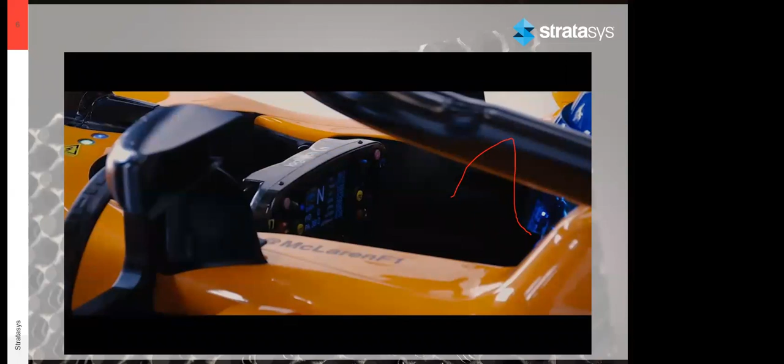It's one part or 1,000. From lifelike prototypes to full-function components, we're helping turn complex problems into simple solutions while quietly changing millions of lives. It's very powerful when you show a family, this is your baby's heart, and this is how I'm going to repair it. We're constantly questioning, inventing, and reinventing.

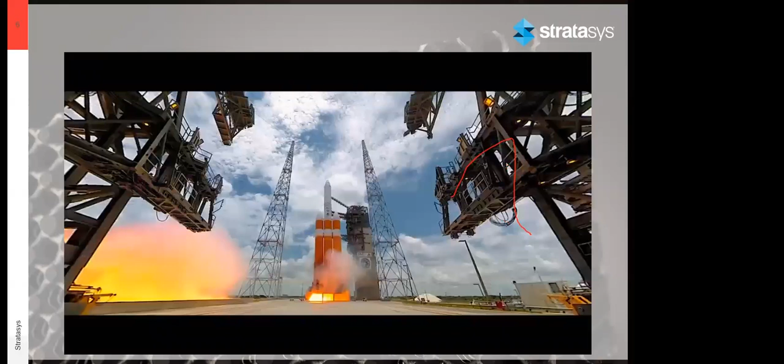Great, so a little more about Stratasys. Stratasys has been in the market for the last 30 plus years and has simultaneously received more than 30 plus awards in innovation. This is the most widely used 3D printer.

Stratasys had the biggest budget in the industry for 2018 for R&D. We have 150,000 plus installations, the biggest installation base in the world. More than 1,300 granted or pending patents.

There are more products which will be launched in 2020. Very recently, we launched one, the Collegiate series.

Now, 3D printing and industry in motion - to give a little more perspective on this, 3D printing and industry in motion, this is an incredible time to be a part of this industry.

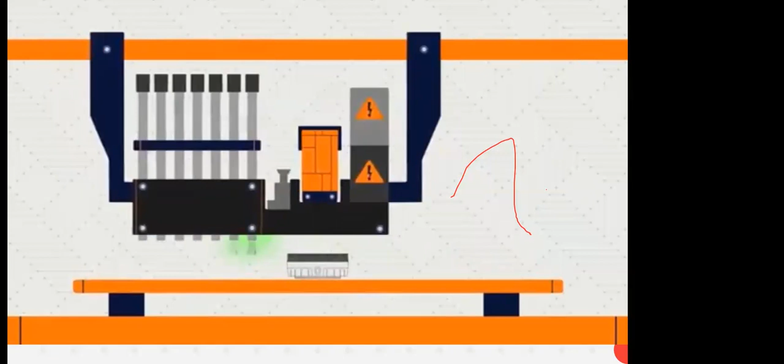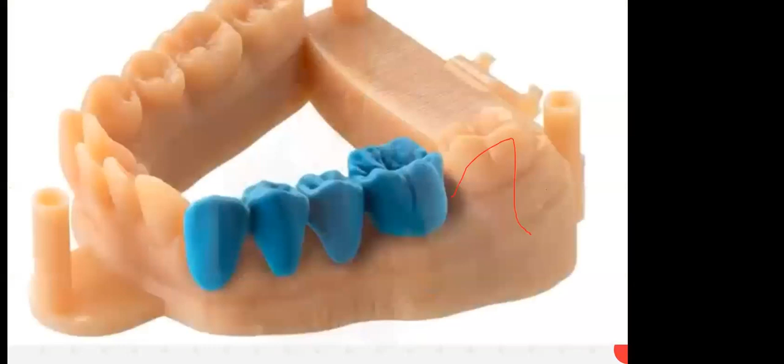A physical object directly from a digital file. Software takes a computer design and slices it into layers. These layers are instructions for the 3D printer, which builds them one at a time until what was just data becomes substance. There are many different 3D printing methods: plastic extrusion, liquid jet, laser sintering, and even more types of 3D printing parts - strong and durable, beautiful and smooth, even wax or metal.

Some 3D printing methods serve a very specific purpose, while others are used across industries, and even in homes. And this is what's amazing about 3D printing. It's not one process to create an object. It's a new way for designers, engineers, all kinds of creators to express themselves and solve problems. It's making our cars and planes faster and safer. It's empowering companies to invent new products with better quality. It's giving entertainers and fashion designers unlimited creative freedom. It's helping researchers and engineers make our lives healthier. In fact, the effects of 3D printing are already all around us. Pretty cool, huh?

Okay, so getting into a little more detail on 3D printing. Now, 3D printing is known by many names. What you see here is 3D printing, rapid prototyping, rapid manufacturing, additive manufacturing, direct digital manufacturing. So these are the major terms used for 3D printing.

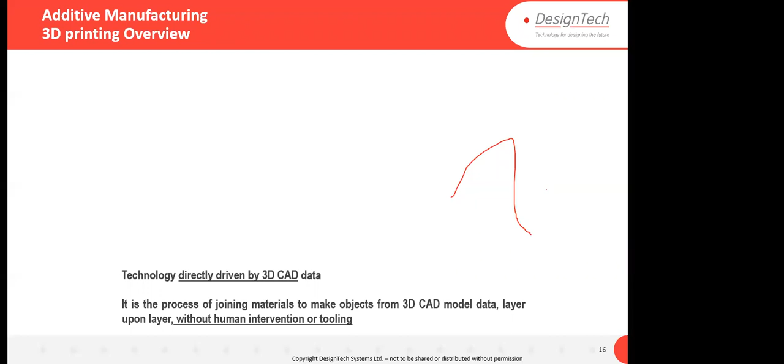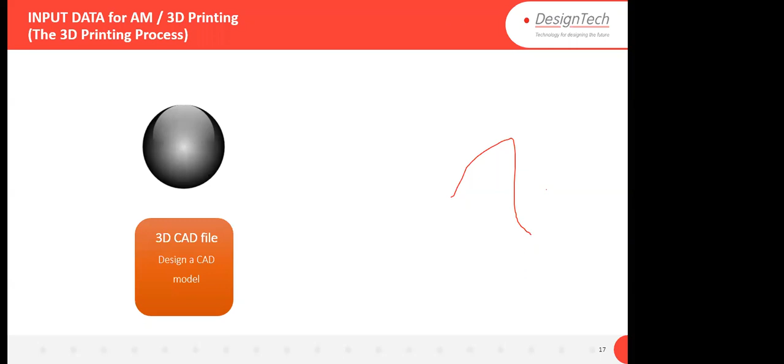So this is what I mean by additive manufacturing. Now for additive manufacturing, you have to have a CAD file which is created by a designer. This goes to CAD slicing, which is the printer software. Now the print preparation happens here. The software slices the model into thin layers as per the printing capability of the printer, which goes into printing, and you have a model printed layer by layer from bottom to top.

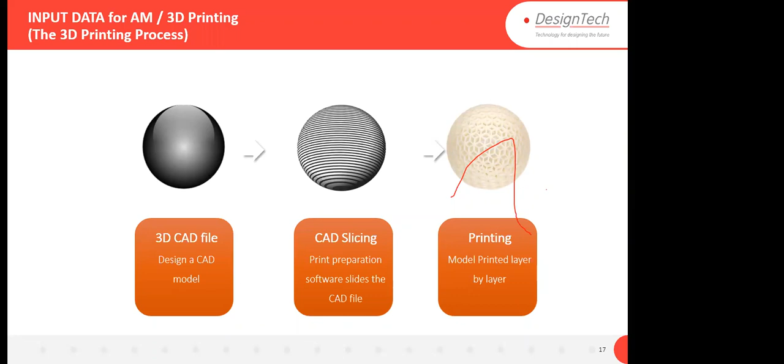Very recently, we have launched GrabCAD. GrabCAD is more synchronized and it can use native CAD files. Previously, the starting file was STL. Now you can start from any native CAD format. This GrabCAD is a connectivity between the printer and the computer where you have the CAD file. So this increases productivity with print management and remote print monitoring - like, supposedly you are not there in front of the computer, but you can still access it over your handheld phone.

So what technologies does Stratasys have?

We have fused deposition modeling and material jetting. Fused deposition modeling, known as FDM, is very common in the market today. It uses thermoplastic filament heated to a semi-liquid state, then extruded as per the STL and the computer-controlled tool path to build layer upon layer.

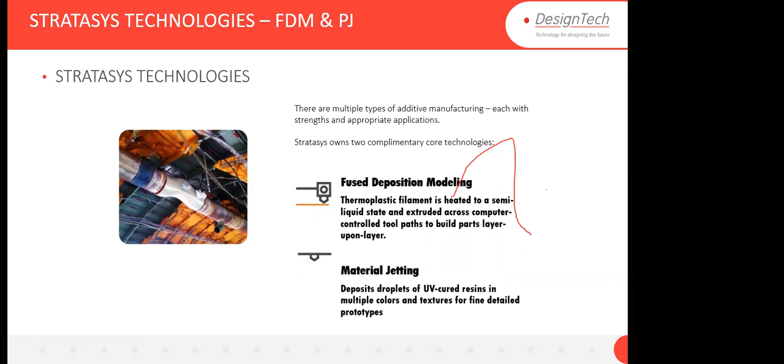For material jetting, which is our PolyJet technology, droplets are deposited and then UV cured. The resins get hardened and you have a finished part directly from the machine.

This is a comparison between PolyJet and FDM. PolyJet is more like 2D printing, similar to HP or Canon printers. There's a bed on which droplets of resin are dropped as per the STL and then cured with UV light. For FDM, both technologies require support material.

For FDM, it's a thermoplastic filament such as ABS, ASA, nylon, PPSF, or Ultem, which goes into the extruder, is heated up, and extruded in a semi-viscous state. So they both complement each other.

What you look at here, if you're planning to buy a printer, is what is your requirement? Are you looking for strong prints, or are you looking at aesthetics? PolyJet would be the printer that can give you good aesthetics, whereas FDM is good for strength. It is strong, tough, and durable.

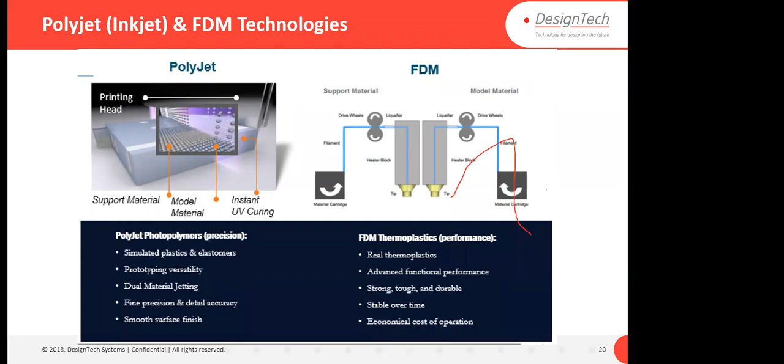Now you see here the advantages given in picture format. PolyJet can give you transparency. In a single part, it can have different materials. You can have a smooth surface finish, one of the best smooth finish surfaces in the industry.

You can use PolyJet printers to print molds, which, depending on temperature and viscosity of the print, can give you anywhere from 25 to thousands of injection molded parts. It's also used in the medical and dental industry. You can have the choice of flexibility and the choice of color.

For FDM, it is strong, durable ABS. You can have economic sparse fill, and you can have high performance materials. What I mean by high performance is materials with a deformation temperature of up to 210 degrees. You have some odd 9 colors, then you have the versatility of nylon as well as medical and food contact grade materials.

Now, how does it happen? You need to pre-process, using the software I showed earlier, and then it goes into the printer. It is printed, and you can post-process it as per your desired output, which includes transparency and color. It's already printed in color - you just need to apply a coat to give it shine.

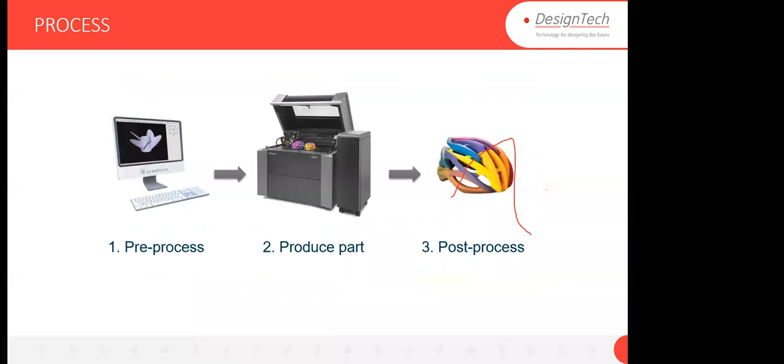The scope and applications of 3D printing in today's industry. Things like concept design, concept validation, concept models, and prototypes were part of yesteryears. Today, functional prototypes came in, where fit and form were checked, vibration drop and destructive testing were done, as well as rapid component fabrication.

Now the new era of 3D printing is here, which includes manufacturing tools, injection molding, blow molding, jigs and fixtures, casting patterns, hydroforming. You can also use it for end use parts, such as end of arm tooling and final production parts. This end use parts application is very common with the aerospace industry, which I'll cover in the coming slides.

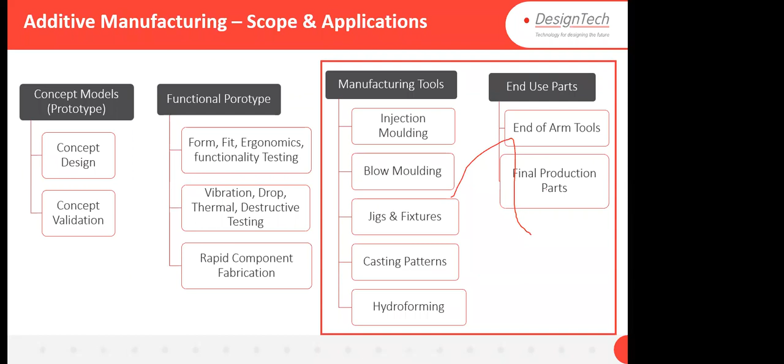So how does it help? It helps with time and cost savings - 40 to 90% lead time reduction, 70 to 95% cost reduction. You can have a digital inventory; you don't need to have specific products, you can have it digitally. This helps eliminate or reduce inventory requirements, produce components on demand, and have painless design revisions. You're also mitigating risk and increasing accuracy with conformal components.

Now, getting into the applications of additive manufacturing. There are four different applications, starting with rapid prototyping, which everybody knows today. Then comes manufacturing aids, forming tools, and ready parts. These three categories - manufacturing aids, forming tools, and ready parts - are beyond prototyping. In years past, we looked at 3D printers just for prototyping; now we are into beyond prototyping with manufacturing aids.

A little more detail: the cost is being reduced, the time is being reduced, assembly steps are being reduced or eliminated, and performance, accuracy, and ergonomics are being improved by the manufacturing aids.

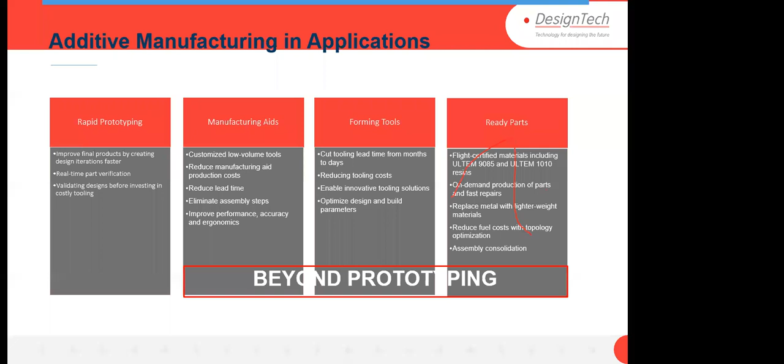Now let's get into rapid prototyping. I have a few case studies to cover here.

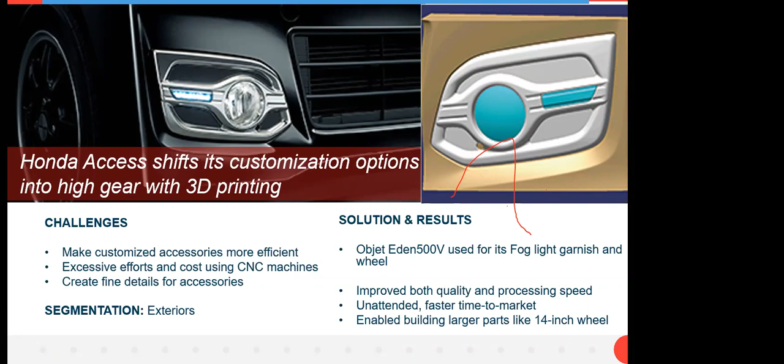Now Honda again did a lot of prototyping. The challenges were to make customized accessories more efficient and effective, reduce effort and cost compared to using CNC machines, and create fine details for accessories. The solution which the 3D printer helped them with is they improved both quality and processing speed, achieved faster time to market, and enabled building larger parts like a 14-inch wheel. Now you can see on the right top, these are the finished and unfinished parts and the wheel.

Coming to jigs and fixtures, let's look at a video first.

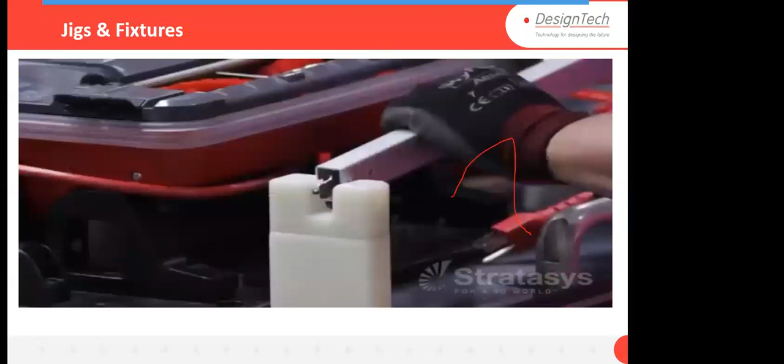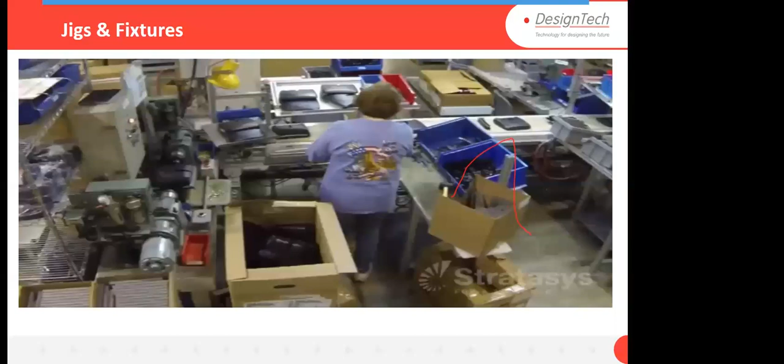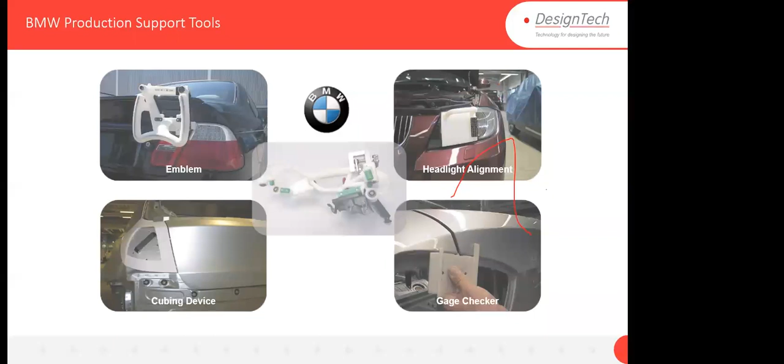So just a small example where BMW is using Stratasys for jigs and fixtures. Now these are just a few areas wherein it's being used, like emblem fixing, headlight alignment, cubing device, gauge checker. The jigs and fixtures is a tool that is designed for functionality, without compromising the ergonomics and function, by design for manufacturability.

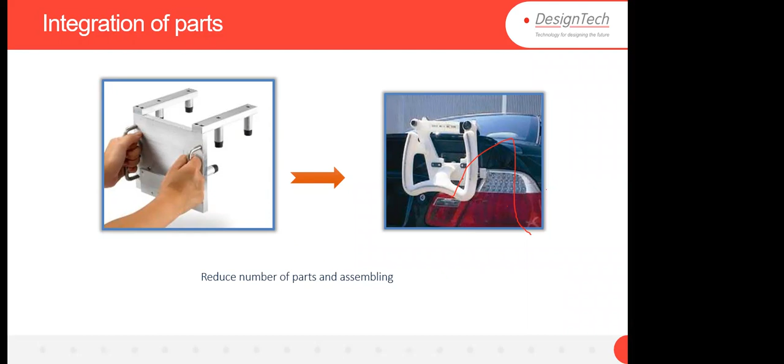See, a person is holding it in his hand. The challenges were limited design freedom, optimal work effort and ease of use, limited process repeatability, and cost and lead time higher than desired. The solution and results: the Fortus system was used to produce more than 400 jigs and fixtures, with cost savings of 58% and lead time reduced by 92%. On the right you are seeing the emblem fixing fixture, this one.

Now the second use is end of arm tooling. This is an end of arm tool used where our arms cannot reach. I have a video to show this.

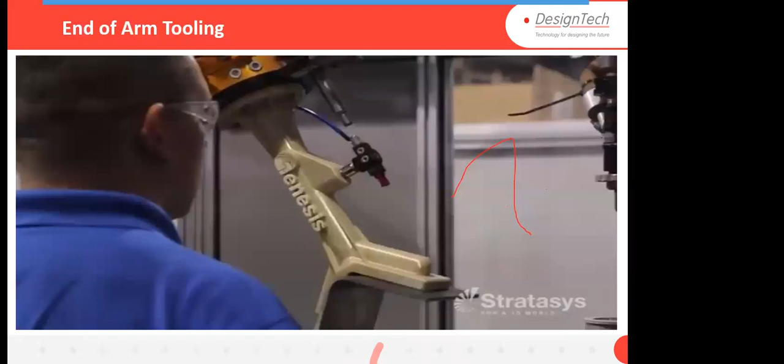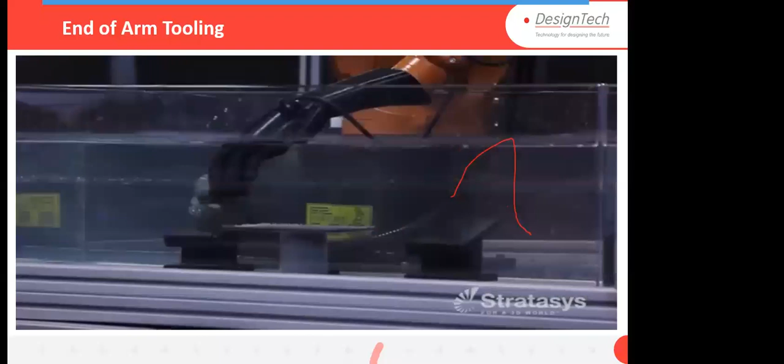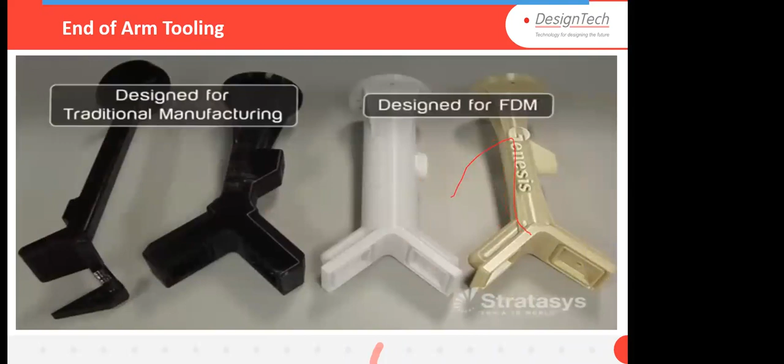Okay, I believe it was not audible, let me explain it. What happens here is that's an end of arm tool which is used for water jet cutting of metal parts. Now metal parts, or say carbon fiber parts, if you hold it with your hand under that high speed water, there are chances of injury. So what happens here is it is held by vacuum tubes, and under the water jet it is easily cut as per the requirement.

Now this is the end of arm tool which was being used in the video. This is made of a material called Ultem. What you see on the left hand side, on the black end of arm, is the carbon fiber part, which was cut by the water jet. So how does it help? Weight reduction, consolidation of tooling components, improved ergonomics, easy customization, cost effective for lower quantities, and tooling can have more complexity, as the tubing goes inside from the inner part of the end of arm, so you can have a better ergonomically designed part.

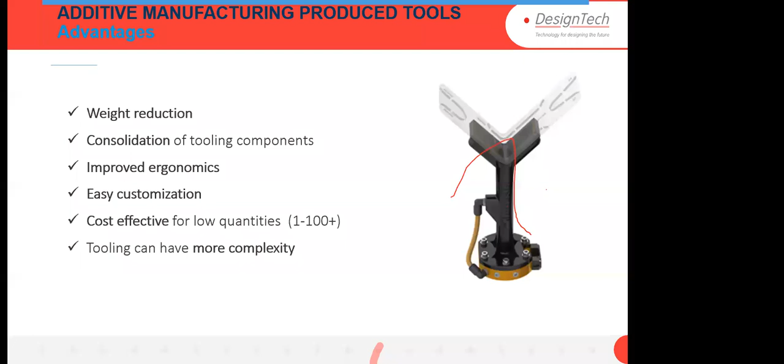Now it is also used for injection molding and blow molding. This is a video for injection molding. I am very much hoping that you'll be able to hear it.

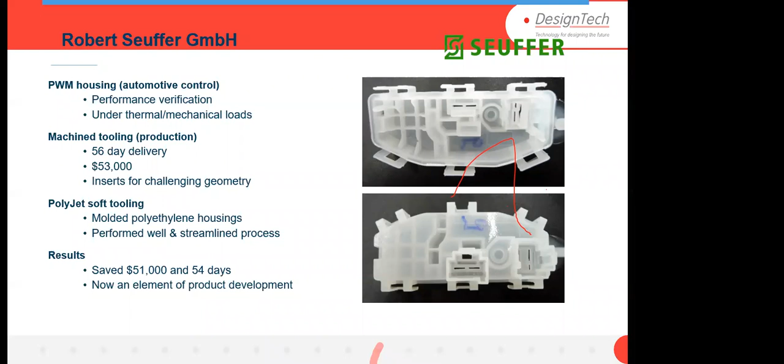Now, how it helps is the mold can be prepared, printed in a day's time, say 24 to 36 hours, whereas in machine tooling, it takes 56 days of delivery. So the cost is reduced, the time is reduced, as well as the process is streamlined, and at the end of the day it is saving for the company.

Now, similarly, you can use 3D printing molds for blow molding.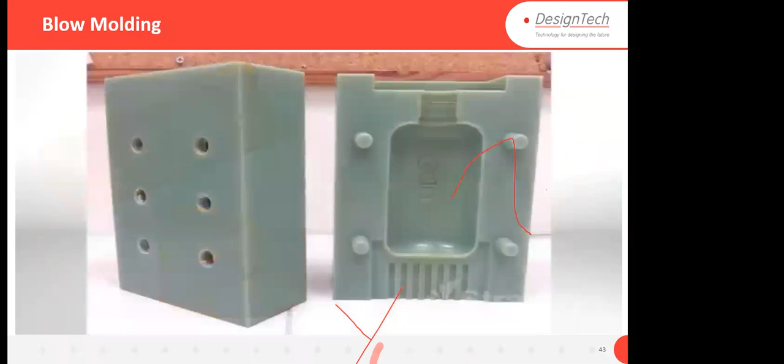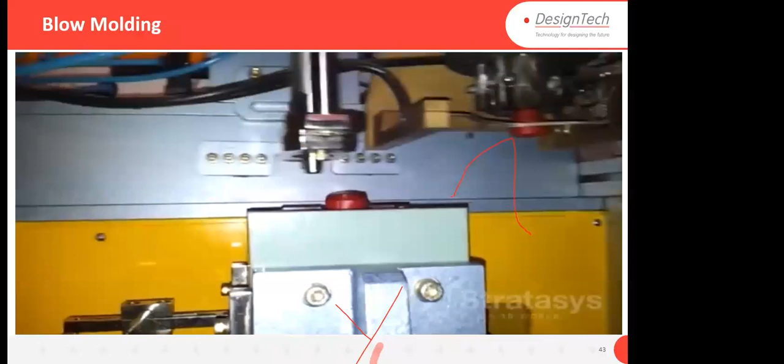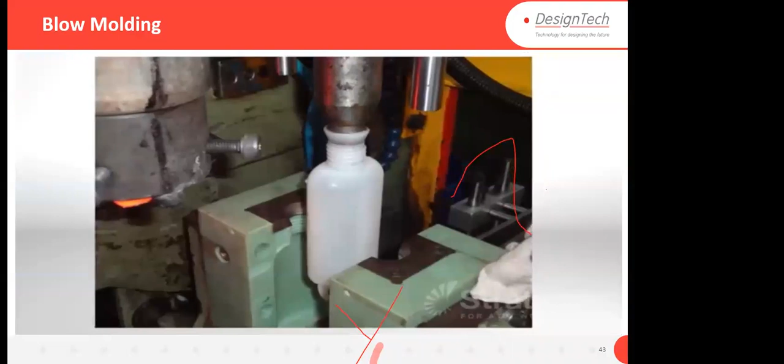Replacing machined metal mold with Polyjet allows companies to make bottles, product in material with up to 95% reduction in time and cost. For further information, contact Stratasys Application Support.

Great, so moving ahead, the benefits of Polyjet blow molding is average lead time savings of 85 to 95%. Average cost savings is 75 to 95%. Efficiency is more design validation at an early stage, and enhanced quality as per the designer's creativity. And the best part is you are using the real material for a true to life functional evaluation.

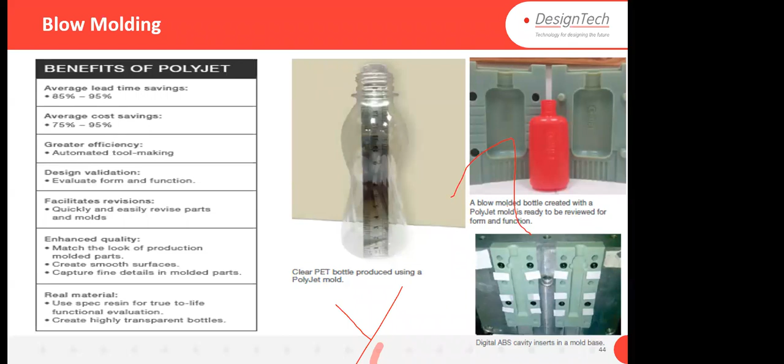Moving ahead, end use parts. Now Airbus flies with more than 1,000 parts printed out of FDM in place of traditionally manufactured parts for the airlines.

Etihad, and this aftermarket also is covered by 3D printing, wherein you see here Etihad announces certification of cabin interior components produced on Stratasys equipment in Abu Dhabi.

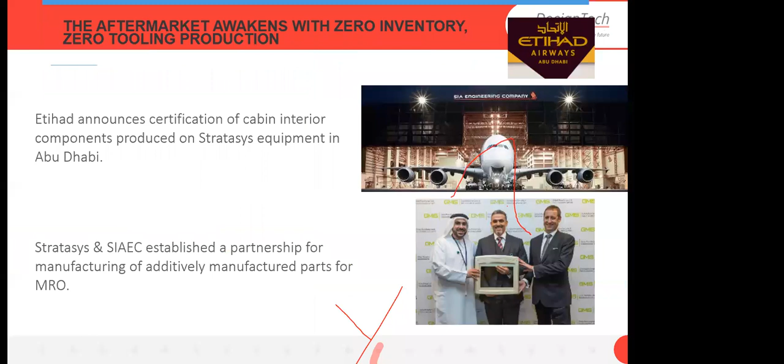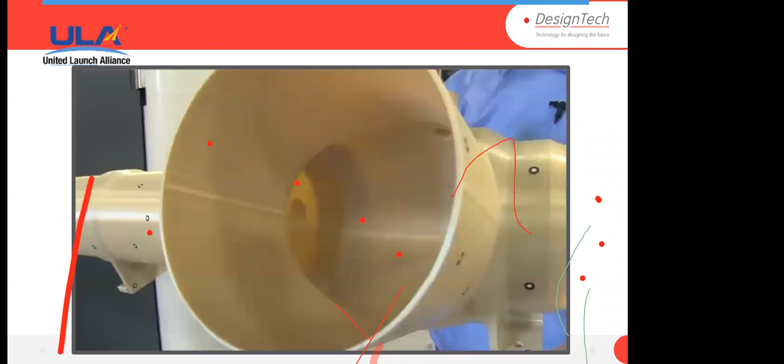Okay, so moving ahead, how has this additive manufacturing matured till now? This is what we are going to look at in the next few slides. So there has been strong adoption of prototyping, strong adoption of jigs and fixtures, then strong adoption of tools.

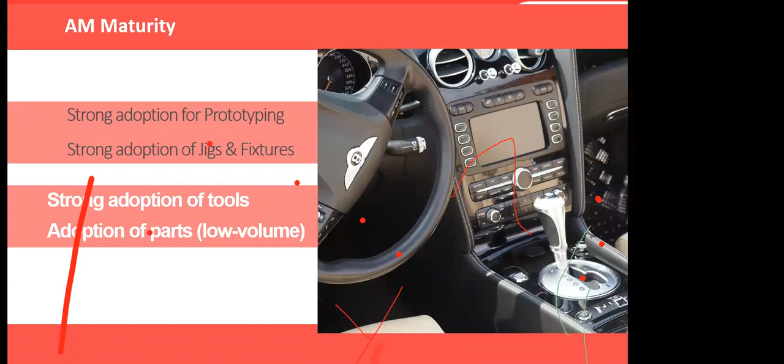Adoption of parts, low volume production parts, then high temperature materials up to 210 degrees centigrade being used today. Then there are biocompatible materials. Then there are FST certified materials also, like flame - FST is flame, smoke, and toxicity.

Now, if you burn ABS, it burns with black soot, whereas there are materials available with Stratasys which doesn't burn, or say they burn with no fumes at all. Then high strength and chemical resistance.

Then with additive manufacturing, we can also create rubber-like material and carbon fiber embedded material, electrostatic dissipative material, and soluble support.

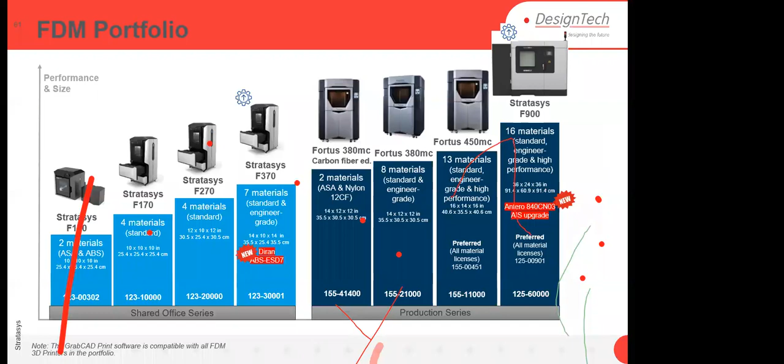So the materials currently available from the FDM bench are the thermoplastic elastomer, which is TPU 92. Then you have standard plastics, which is ABS, ABS Plus, ABS M30, ABS ESD7, and so on. Engineering plastics like PC and nylon grades, performance materials wherein you have Ultem and you have nylon along with Antero.

The specialty materials are ST130, certified grade, and custom colors.

Look at the Polyjet portfolio. It starts at Objet30 Pro and it goes up to Stratasys 850, 835. Now the 850 is a full color Pantone validated printer, whereas the Objet30 Pro can print in different materials, but not at one go.

You have Objet1000 Plus, which has a 1 meter bed size.

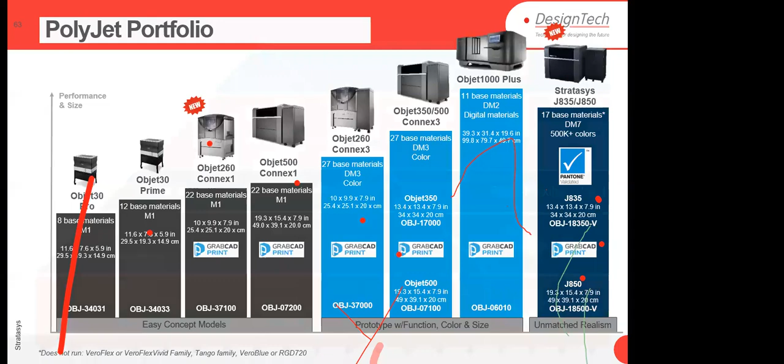Now, discussing the materials. The basic materials, which are rigid, are Vero White, Vero Black, Vero Clear, and so on. For flexible materials, you have Tango Black Plus and Tango Gray. The rigid-flexible blend is Veroflex, which comes in J850, 750, and 835.

You have specialty materials, which would include biocompatible, medical grade, and Digital ABS Plus with high temperature, which are the simulated ones I had shown you in the videos for blow molding or injection molding. These are used for that.

Now in biocompatible materials, there are materials from the Stratasys bench which you can use in contact with saliva for 24 hours, or in contact with the skin for 30 odd days.

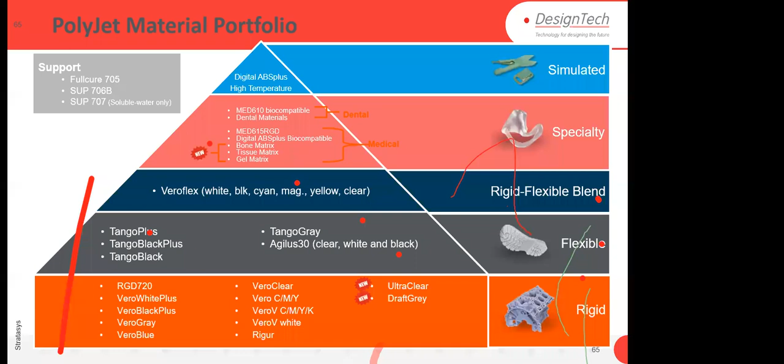Just to end it, you have a small video.